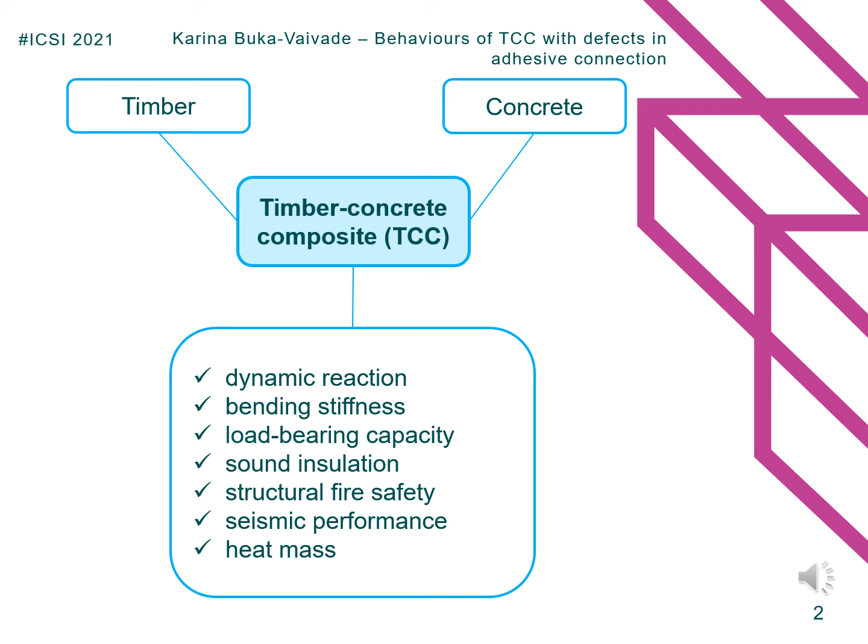Timber is a renewable material, which makes a significant advantage for its use in construction, but concrete is the most widely used man-made building material. Timber concrete composite structures can ensure more efficient use of resources and meet the growing demand for sustainable structures. Combining such two materials as timber and concrete, we can improve various classical disadvantages of wooden floors.

The most efficient way to combine advantages of timber and concrete is providing a rigid connection between timber and concrete layers. As you can see on the slide, full composite action provides a high bending stiffness, which results in smaller deflections, and can provide concrete layer action only in the compression zone.

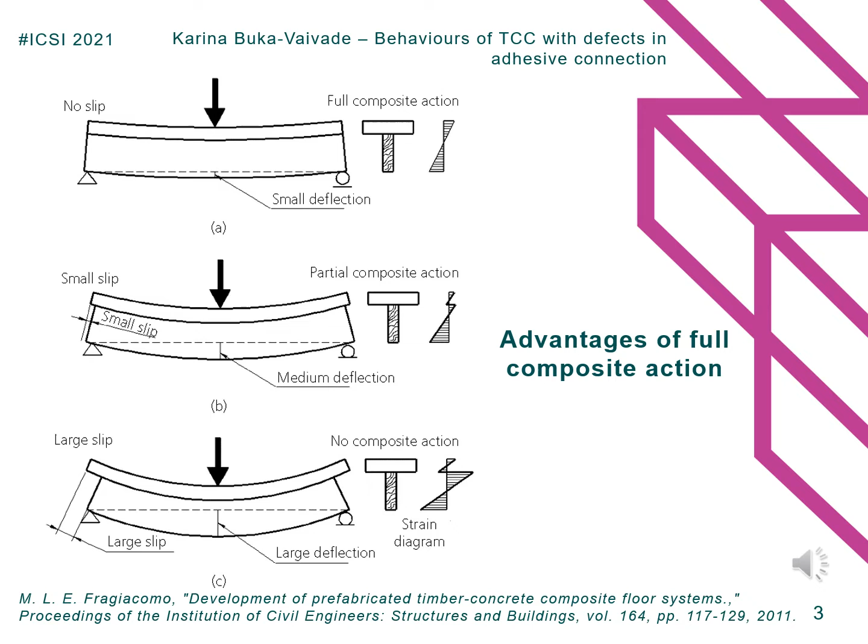But there is one important moment. It is difficult to predict the quality of the obtained connection with the classic production method of continuous rigid connection, when timber layer and precast concrete layer are simply glued together. So the aim of this study is investigation of the effect of non-glued areas in connection between composite layers on the shear stresses and energy absorption. Also, a method of creating qualitative connection between composite layers is offered.

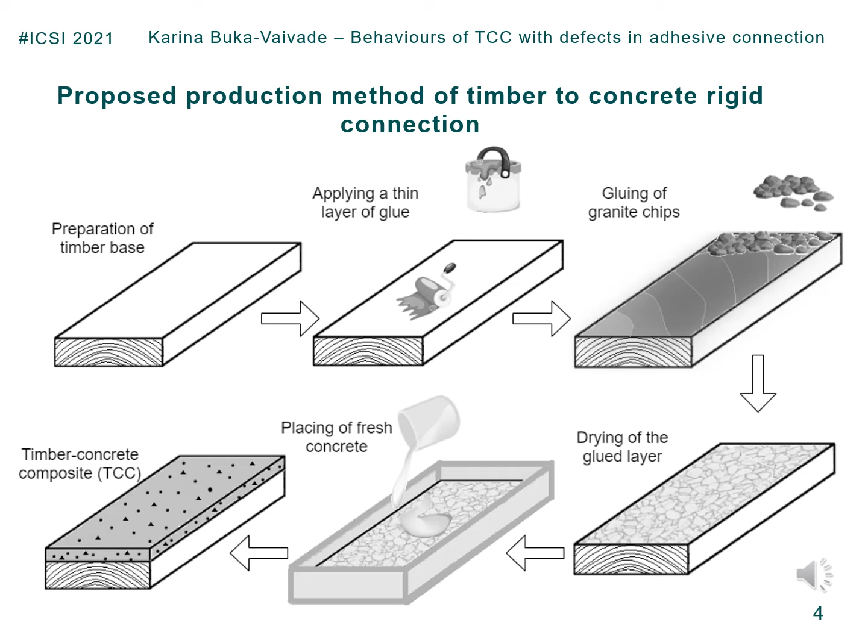On the slide you can see the proposed production method of rigid connection between timber and concrete layers. It provides preparation of timber base, applying a glue layer on timber surface, gluing of granite chips, and after drying of gluing layer, placing of fresh concrete.

To investigate the effect of the adhesive connection on behavior of timber concrete composite subject to flexure, two types of specimens were prepared. The first specimen was a CLT panel glued together with precast fine-grained concrete layer with strength class C20 and additional carbon fiber plate glued on CLT surface in the tension zone.

The second specimen was identical to the first, but a rigid connection was produced by the proposed method, which includes gluing of the granite chips with dimensions 16-25 millimeters to the CLT surface. Both specimen types with 1.8 meter span were tested in 3-point bending until the collapse.

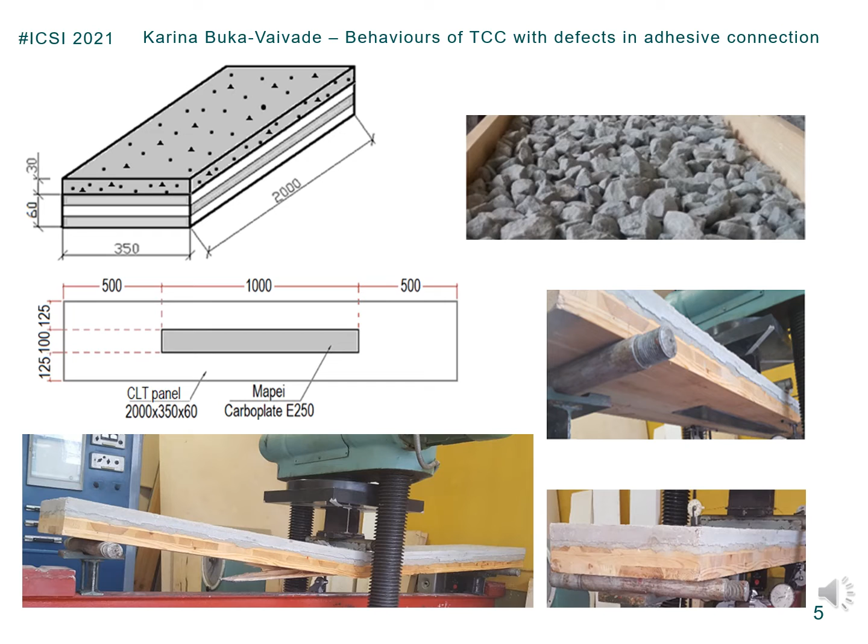Here you can see comparison of the behaviors of timber concrete composite specimens produced by classical dry method and proposed method. As it can be seen, the timber concrete composite without granite chips develops much larger displacements than those obtained in the calculations. At a load level of 30 kN, the experimentally determined displacements are equal to 22.8 millimeters, which is more than 52% larger than those calculated with the 3D damage model.

At the same time, the proposed production method of rigid connection provides full composite action of the specimen and additional local strengthening. The specimen with granite chips showed both high load-bearing capacity as well as smaller maximal vertical displacements. The average destructive load of this specimen was 41 kilonewtons, and for timber concrete composite produced by classical method, destructive load was only 32 kilonewtons. Maximal displacement at the load level of 30 kilonewtons for timber concrete composite by the proposed production method was smaller than 6 millimeters.

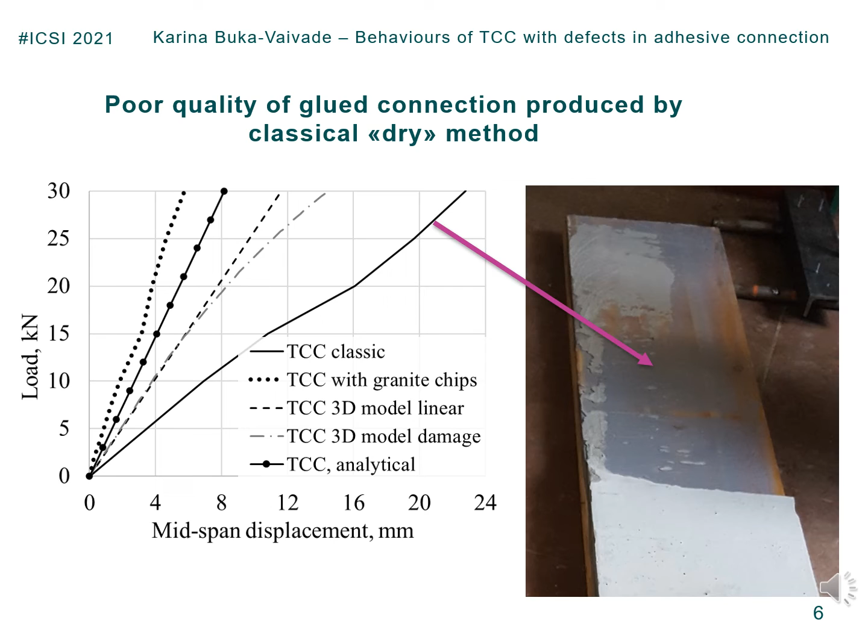Strengthening effects of the concrete layer by granite chips can be explained by this figure. Cement paste has worse strength than aggregate, so granite chips as concrete aggregate locally increase the strength of concrete, which is observed at the stage when nonlinear behavior begins to develop in timber concrete composite.

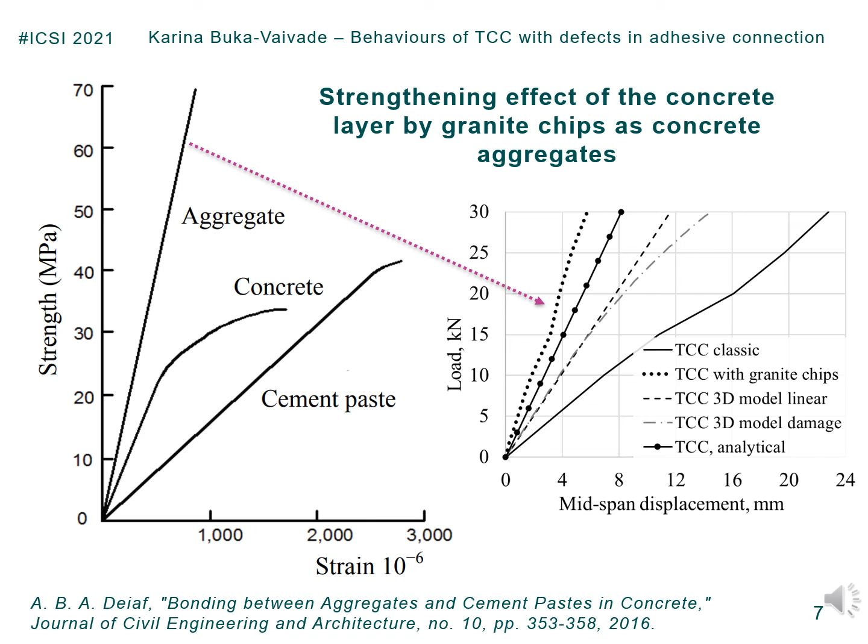To determine the effect of low-quality glued connection on the load-bearing capacity of timber concrete composite elements subjected to flexure, 3D numerical models with different size and amount of qualitative contact surfaces were developed. Here you can see adapted schemes of the qualitative glued areas in connection between timber and concrete layers.

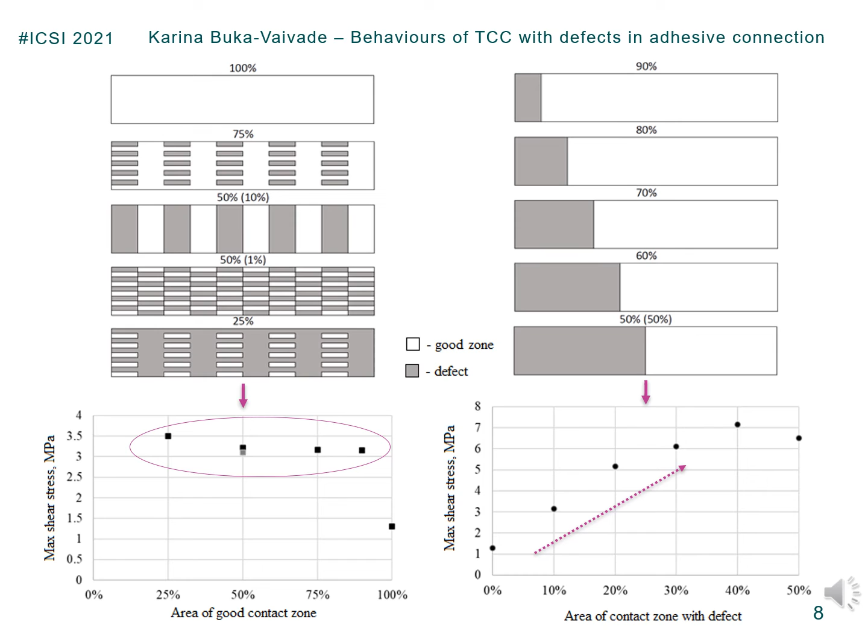The first part of the study shows that poor quality areas with the same length provide a very similar level of the shear stresses regardless of the total amount of defective areas. According to the second part of the study, a trend of maximum shear stresses increasing with the increase of the area of the separate non-glued area has been identified.

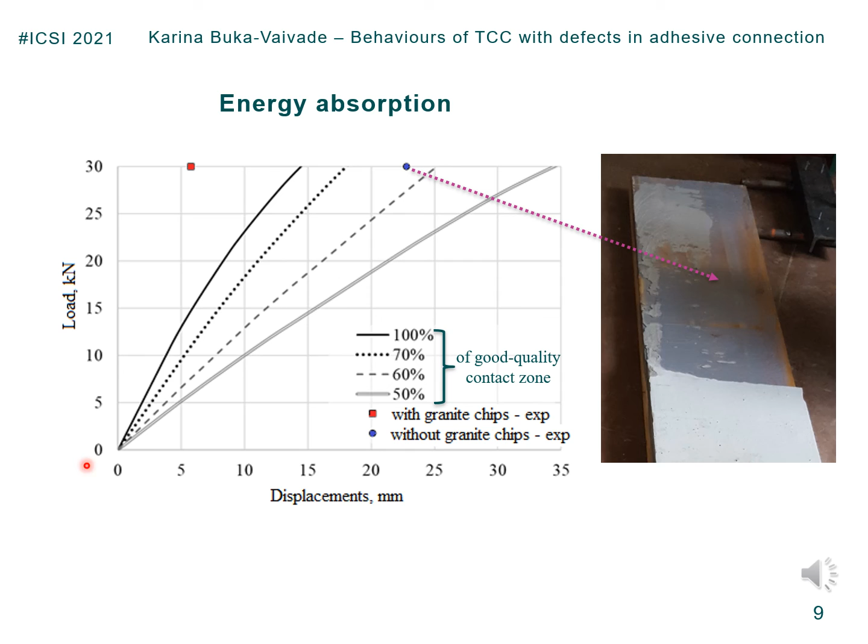As a result of the research, the following main conclusions were obtained. Defects in adhesive connection between timber and concrete layer may be the cause of the drastically different behavior of timber concrete composite. The use of classical production method for rigid connection is dangerous because it is difficult to predict the quality of the obtained connection. So it is not safe to predict the behavior of such timber concrete composite by models with full composite action.

The rigid connection produced by gluing of granite chips allows visual control of the glued connection quality and provides natural development of the bond between concrete matrix and granite chips as aggregates of concrete. Moreover, granite chips can provide local strengthening of the concrete. The increase of shear stresses is influenced not so much by the total amount of non-glued areas, but by the size of the individual defective areas. Large non-glued areas significantly reduce the energy absorption of elements subjected to flexure.